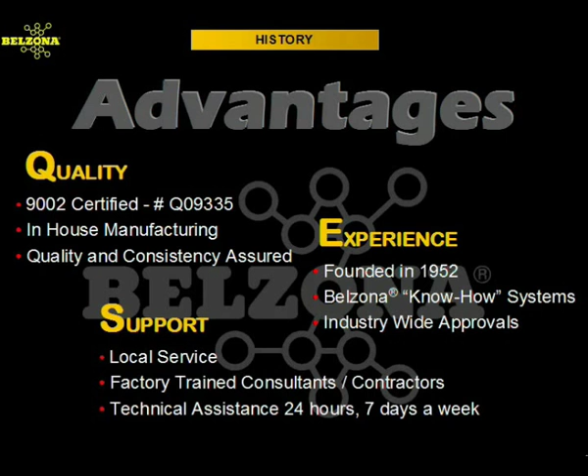Our position in the market as the leader in polymeric solutions has gained us worldwide recognition from prestigious companies, where they specify Belzona procedures and products for the repair and maintenance of their equipment. Belzona can be found all over the world with local representation in over 100 countries. Factory-trained consultants and contractors are ready to help you with your maintenance problems 24 hours a day, 7 days a week.

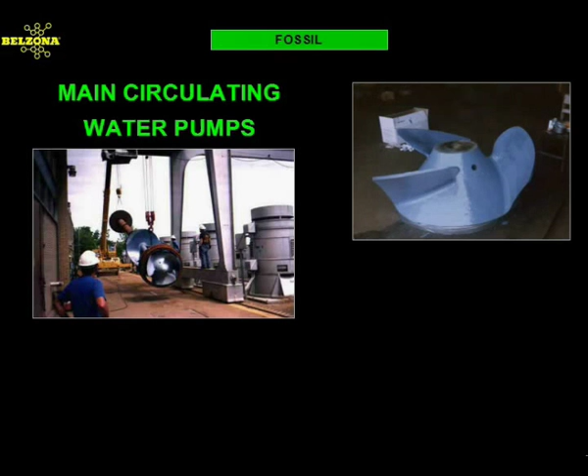Main cooling water pumps are the heart of any power plant. These pumps, because of their size and nature of operation, are costly to maintain and run. Belzona has developed special materials that will protect your investment: specialty rebuilding compounds to rebuild damaged areas without the risk of heat stresses normally associated with conventional welding techniques, and specialty coatings that will reduce the damage caused by erosion corrosion while increasing the efficiency of the pumps, as shown in the following graphs.

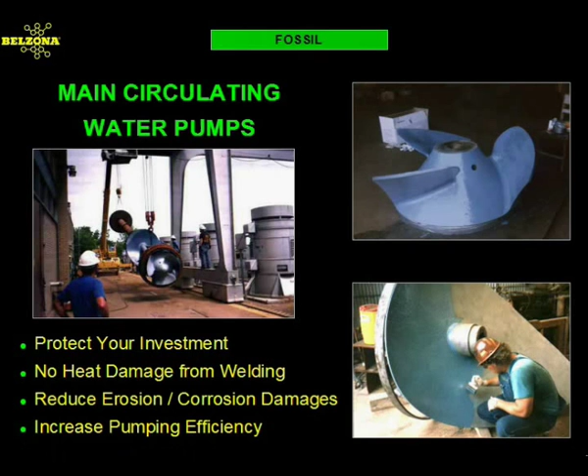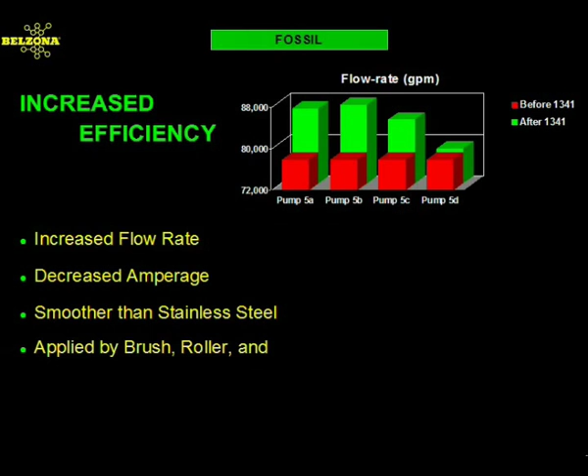Independent testing done by a northeastern power utility on 4 main circulating water pumps demonstrated both an increase in flow rate as well as a decrease in current consumption. This was all possible due to the properties of the Belzona coating, which can obtain a surface finish smoother than that of polished stainless steel, even when applied by brush or roller.

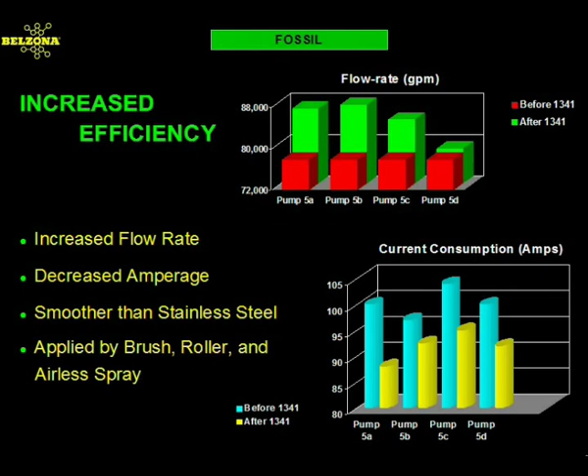In other words, by adopting the right Belzona solution for the maintenance and repair of your pumps, you can save money, not only by prolonging the life of the equipment, but also by reducing its operating costs. Overall, the tested pumps saved this utility over $90,000 per year in operating costs, with a return on investment of only 3 months.

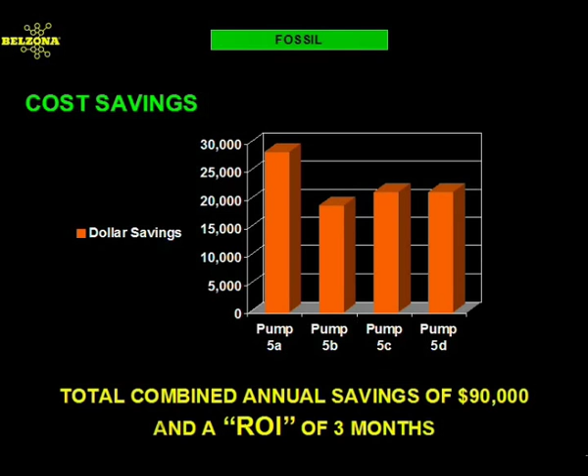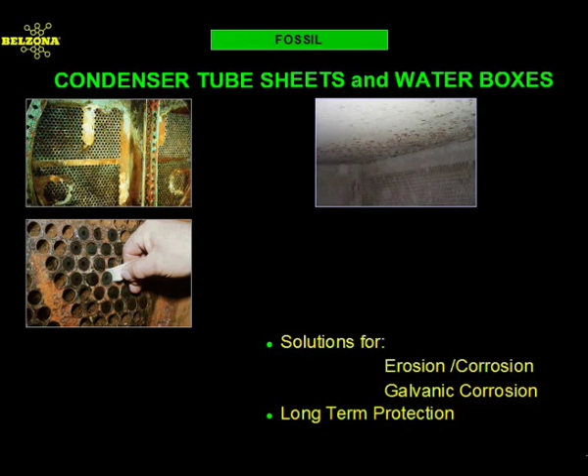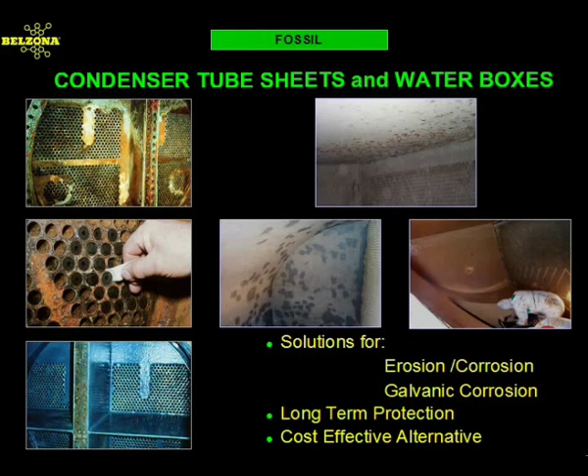Condensers are another type of equipment that can be costly to maintain and repair due to their critical nature. Most of the problems associated with condensers and water boxes can be traced to a combination of erosion corrosion and galvanic corrosion. Belzona has confronted the situation by developing solutions that address the cause of the problem by utilizing materials that excel when exposed to the chemicals and wet environment of this equipment. Belzona solutions are permanent solutions specifically developed to extend the life of your equipment and lower your maintenance costs.

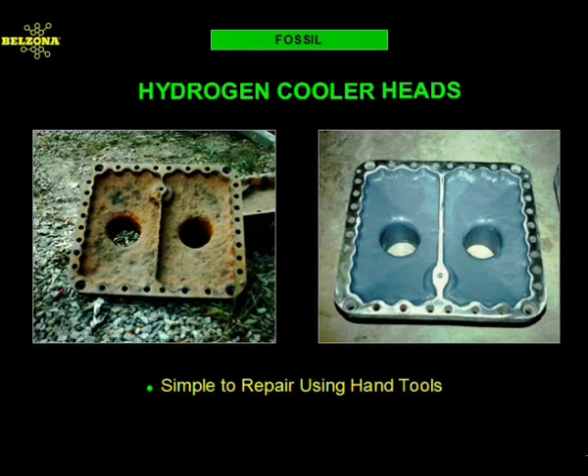This hydrogen cooler head exhibited the typical problems associated with erosion corrosion. The wear and pitting rendered it useless, but with Belzona, this equipment can be reclaimed and put back in service with the use of simple hand tools. The Belzona solution, in many cases, is better than the conventional component replacement. Once a damaged component is fixed with Belzona, it will no longer suffer from the relentless attack of erosion corrosion.

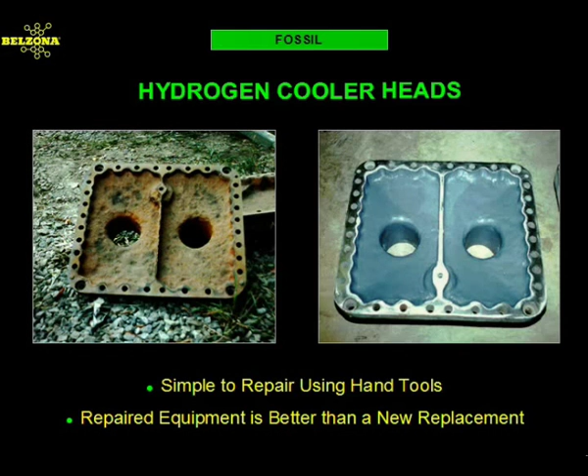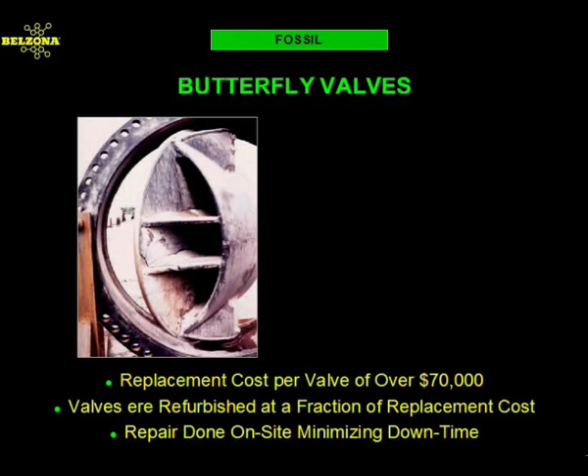This 72-inch Pratt valve in an Indonesian power plant suffered from microbiologically induced corrosion. This condition led to the delamination of the existing rubber liner and the subsequent damage of the valve. With replacement costs over $70,000, the utility was looking for a more economical solution. Belzona stepped in and provided a complete repair package that saved the utility thousands of dollars from replacement costs, as well as downtime losses due to delivery delays.

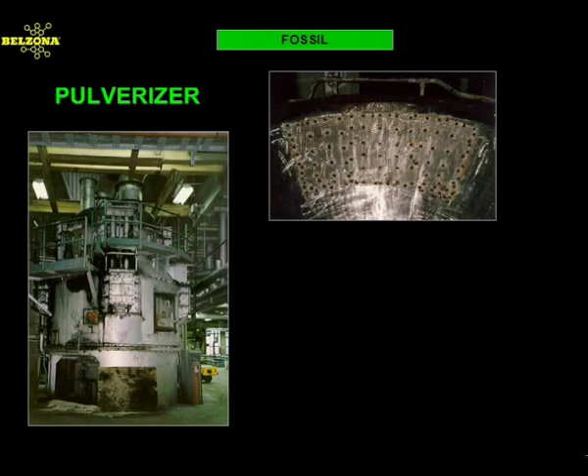This pulverizer classifier cone in a Canadian power plant had to be stick welded on a yearly basis at a very high cost. When approached about this problem, the Belzona consultant recommended a Belzona wear-resistant compound that performed as good as the welding and at a fraction of the cost.

Because of the user-friendly characteristics of the Belzona products, no specialized labor was required, thus reducing the cost of the application. Whether in the field or your repair shops, Belzona will train your application personnel at no cost to you.

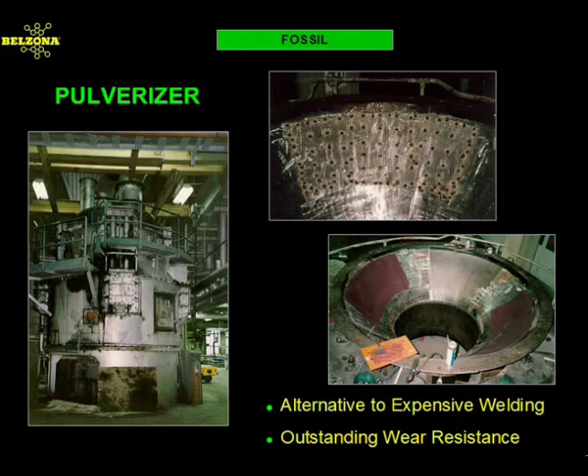Coal fuel pipes are a constant source of maintenance. Due to the erosive nature of the coal, these pipes wear and hole through in a matter of months. This problem is further aggravated by the expense of replacement and losses due to downtime. The Belzona solution offered to this customer addressed both issues by reducing the repair cost and by minimizing the downtime associated with this problem. The Belzona consultant recommended our wear-resistant compound capable of withstanding the punishment delivered by the coal.

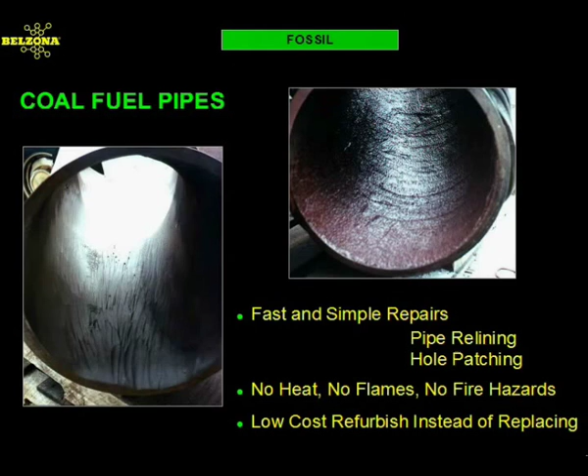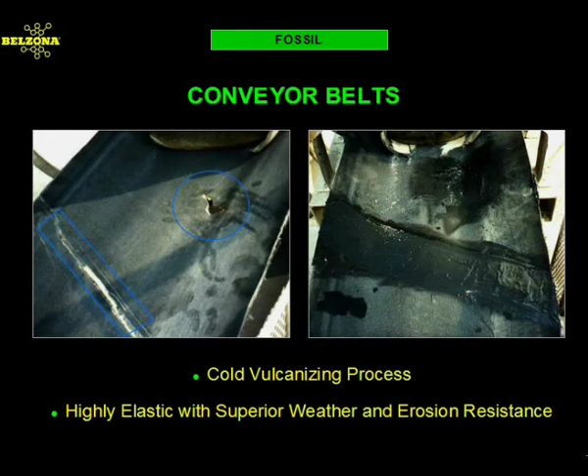Conveyor belts are another source of critical problems. The main problem is not the cost of the repair, but the difficulties associated with conventional hot vulcanizing processes. Belzona can offer you repair solutions with elastomeric products that will cure at ambient temperatures without the need of expensive and cumbersome vulcanizing equipment. These elastomers are specifically designed to resist the abuse of coal transportation. The physical and mechanical characteristics of the Belzona elastomers place them well above that of natural rubbers, thus offering greater weathering and abrasion resistance.

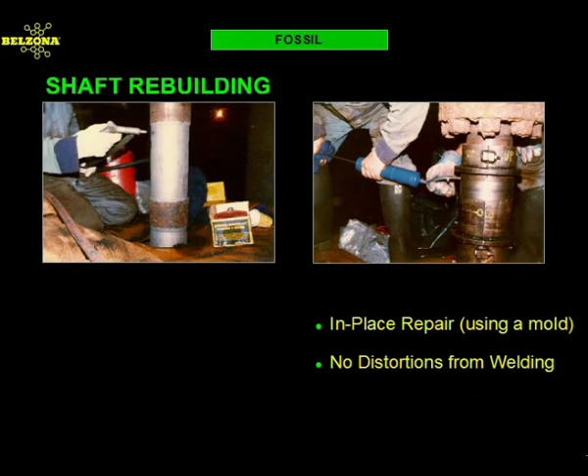Many of the repairs encountered by Belzona consultants are on equipment in confined spaces, where the cost of disassembling is more than the cost of the component itself. In this and similar cases, Belzona has developed special application techniques that will allow the repair to be done in place and with minimal disassembly. Our molding techniques are proven solutions that have saved millions of dollars to the power industry.

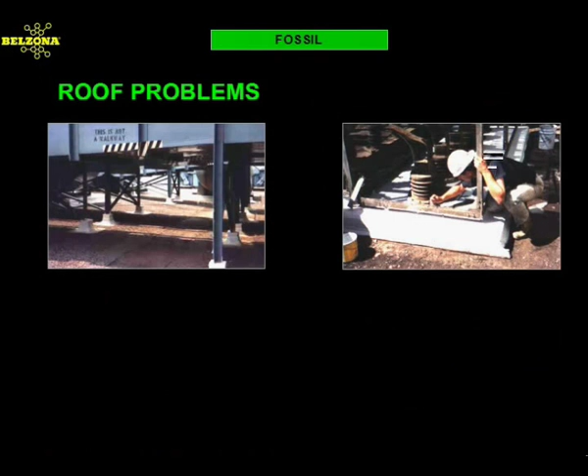Contraction expansion, thermal cycling, UV light, and acid rain are just a few of the factors that contribute to a roof failure. Belzona has developed high-performance membranes and sealants that will solve your problems once and for all. These products have been specifically designed to withstand the rigors of a roof system. Belzona roofing solutions include products that can be applied under wet conditions, including underwater curing for those circumstances requiring emergency repairs.

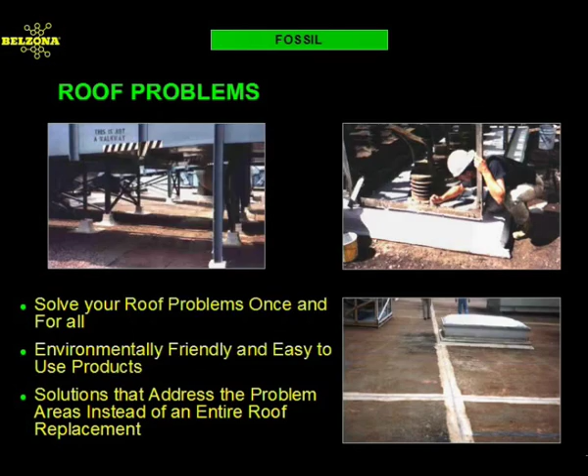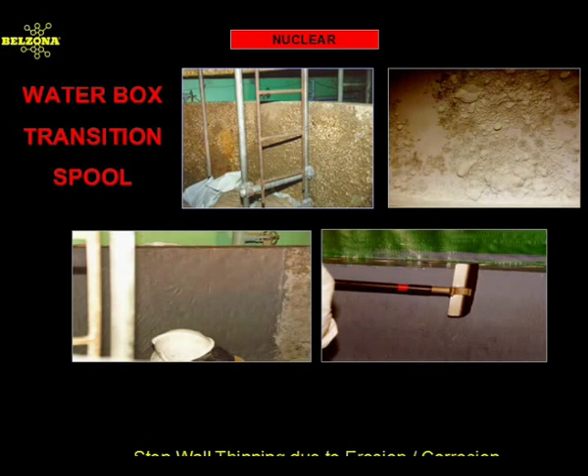The water boxes in this nuclear power plant in California were severely pitted after just a few years of operation. If ignored, this pitting could lead to a catastrophic failure, and replacement expenses could scale up into the millions of dollars. Because main condenser water boxes are critical components, this utility needed a solution that would eliminate the risk of plugging the tube sheet.

The recommendation from the Belzona consultant included a paste-grade material to fill the pitting and a protective coating to prevent further erosion-corrosion from the seawater used as a coolant for the condenser. The Belzona products used in this application contained no VOCs, thus allowing the material to be applied without the need of cumbersome and costly air filtering equipment.

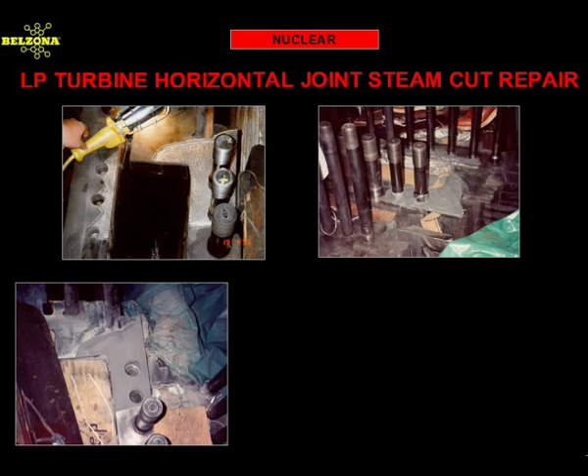This leading U.S. steam turbine manufacturer uses Belzona as the only compound for the repair of steam cuts in the flange area of an LP turbine. The conventional repair included the use of welding and costly in-place machining. The Belzona solution utilizes simple hand tools and molding techniques to do the same job at a much lower cost and without the need to machine.

This nuclear power plant in California has been doing this repair since 1990 with excellent results. Savings related to this repair run into the thousands of dollars compared to less than $500 per repair using Belzona.

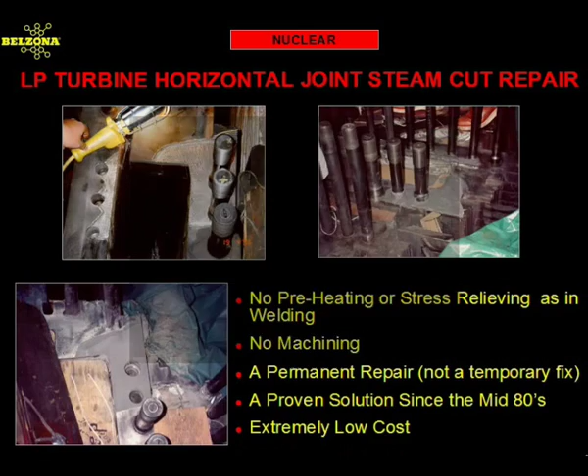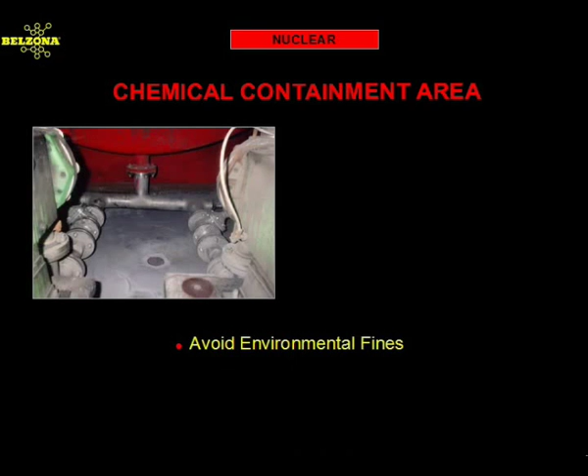Due to environmental regulations, chemical containment areas are fast becoming another source of problems for maintenance personnel. The problem is that concrete by itself is not capable of resisting chemical attack from the strong acids and bases used for water treatment. This power plant in the Northeast was being fined thousands of dollars by the EPA for inadequate containment. Previous attempts to solve the problem did not last, and the problem resurfaced again.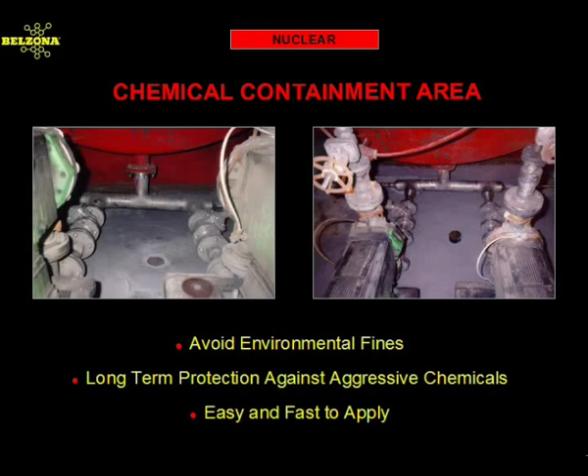Faced with this challenge, the Belzona consultant recommended our chemical-resistant coating to solve the problem. This coating can resist prolonged immersion in very high concentrations of both acids and bases, which makes it the ideal candidate to solve the problem. Just as containment areas suffer from chemical attack, pumps handling these chemicals also face the same problem.

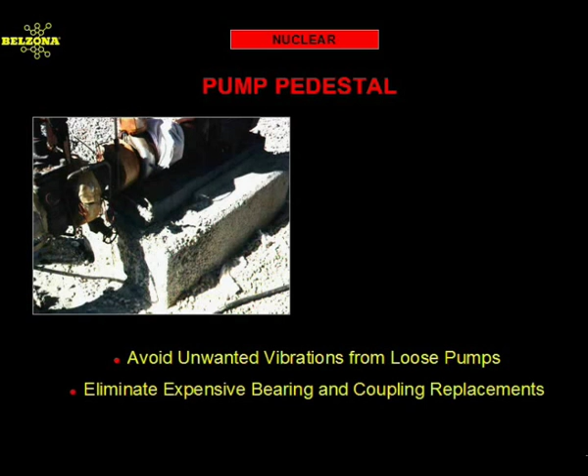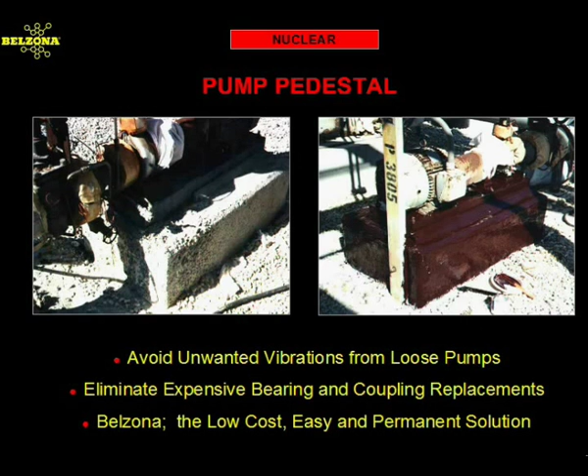The deterioration of a pump pedestal can be extremely expensive, and a loose pump can vibrate and cause the premature failure of bearings and drive mechanisms. The permanent solution for this problem is to rebuild and protect the pedestal with Belzona's chemically resistant products. By using Belzona for this repair, this power plant saved money in the long run by not having to constantly rebuild the pedestal.

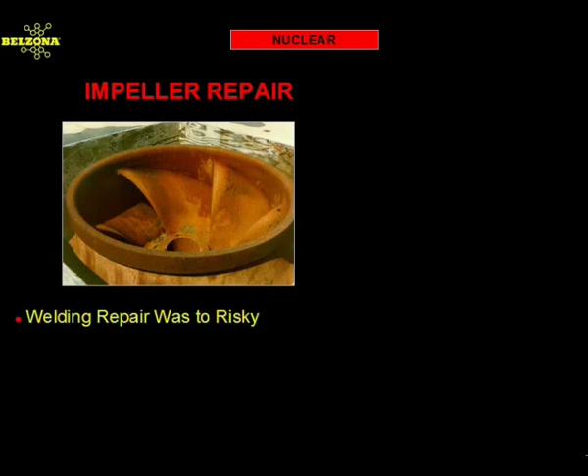This main circulating water pump impeller at a Canadian nuclear power plant was ready to be sold as scrap metal. Because of its cast iron construction, the engineers did not want to use conventional welding techniques and risk structural damage from the heat generated by welding. Instead, Belzona was chosen not just because of its physical and mechanical properties, but because of its proven track record among nuclear power utilities around the world.

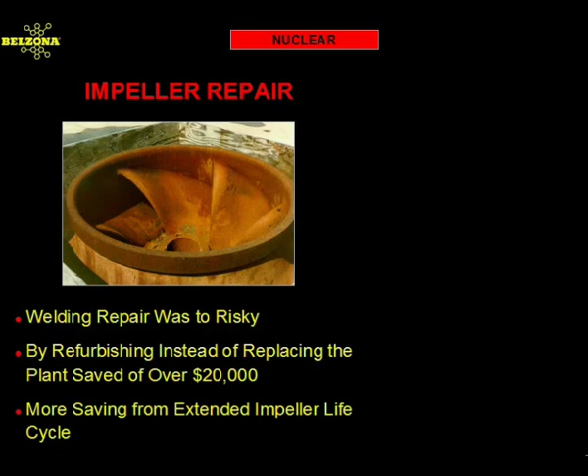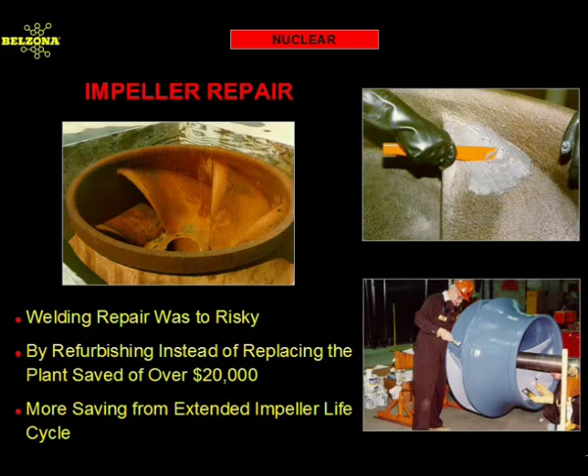This nuclear power plant initially saved over $20,000 by using Belzona rather than buying a replacement impeller. But the savings didn't stop there. This plant will continue to save money as the repaired impeller will require less maintenance while exceeding its original life cycle. The repair of cooling tower basins is another high-cost repair faced by many power plants.

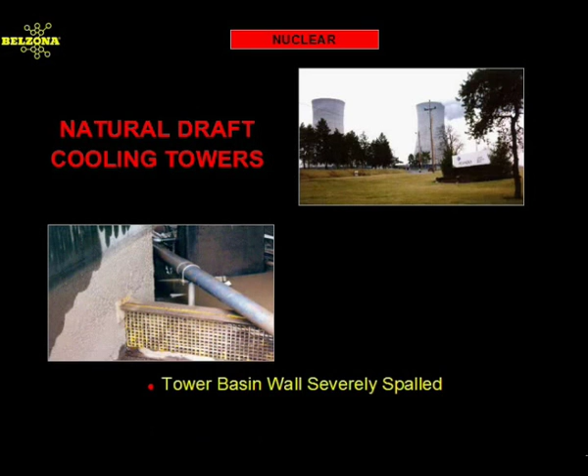This cooling tower in a northeast nuclear power plant experienced excessive pitting of the concrete basin due to exposure to 98% sulfuric acid. All previous efforts to solve this problem failed until Belzona was called to solve the problem. Working in conjunction with the cooling tower builder, Belzona provided a long-term solution at a fraction of the cost compared to the expenses accrued for past failed repairs.

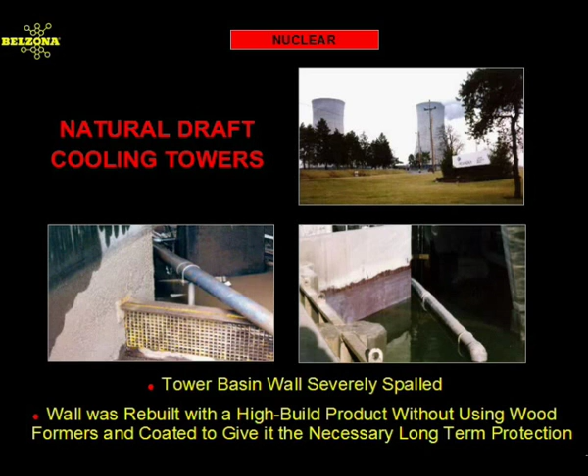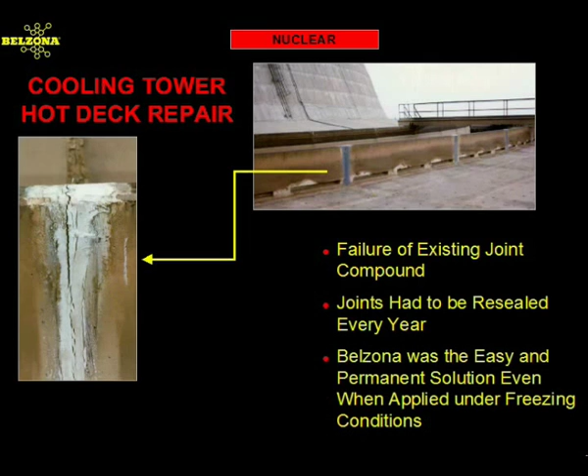The expansion joint in the hot deck of the same cooling tower was another problem that had to be fixed every year. The problem was the freezing and thawing caused by seasonal changes and the inability of conventional materials to remain flexible, causing them to fail in a short time. The utility carried out these repairs every year for 5 years until Belzona solved the problem permanently.

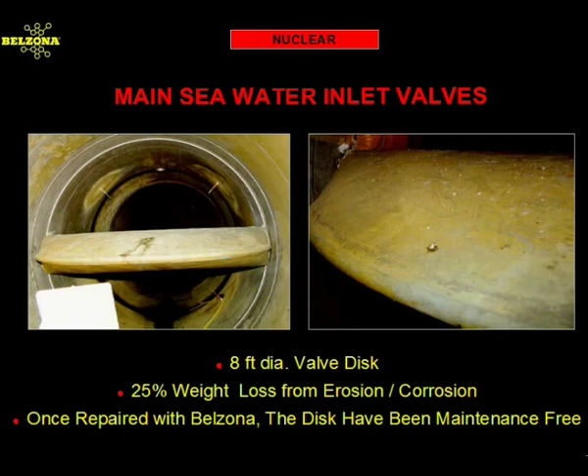This main seawater inlet valve at a nuclear power plant in California experienced severe loss of weight due to excessive corrosion of the valve. Water flow over the valve is in excess of 400,000 GPM. Welding repairs only lasted 18 months at a cost of over $92,000 for all 4 valves. The recommended Belzona product was applied in 1989. Since then, the valves have not required any further repairs or maintenance.

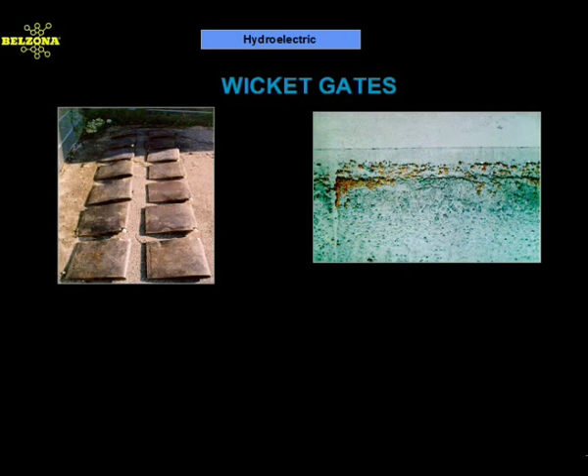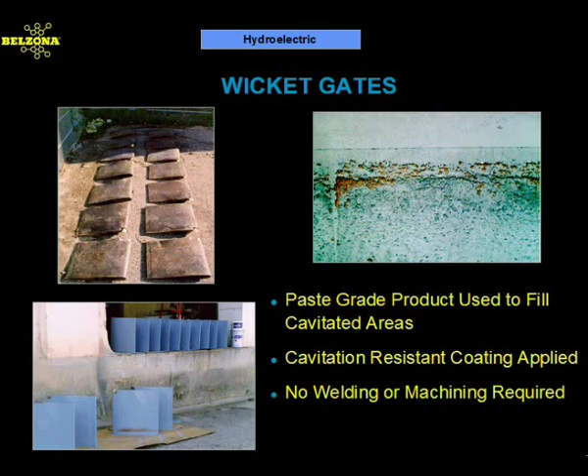These wicket gates at a hydroelectric plant in Puerto Rico started to show light cavitation damage only after a year of operation. Rather than risking the integrity of the gate by spot welding, plant personnel decided to use a better solution. The repair consisted of filling the cavitation damage with a rebuilding grade compound and coating the gate with a Belzona cavitation resistant coating. Although cavitation is a very damaging phenomenon, Belzona has developed materials that will resist light to mild cavitation with good success.

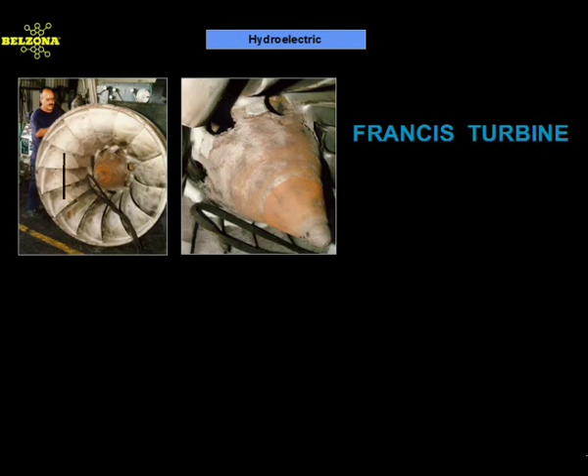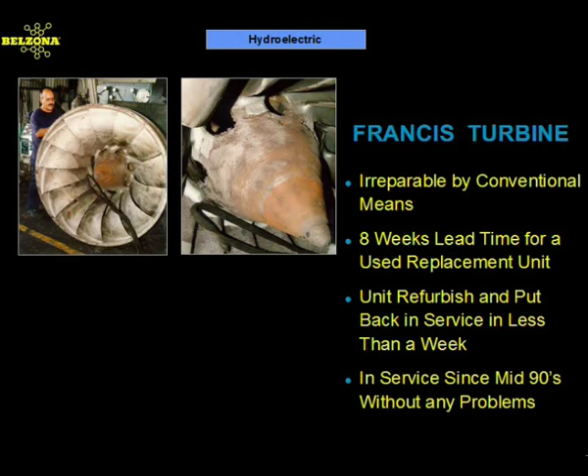This Francis runner at another hydroelectric plant in Puerto Rico shows severe signs of erosion corrosion. Damages to the area adjacent to the cone were massive, rendering the turbine unrepairable by conventional means. Replacement cost and a delivery time of 6 to 8 weeks would have cost the utility thousands of dollars in downtime. Belzona was applied to rebuild the eroded area and a protective coat applied to the turbine to further protect it from the effects of corrosion.

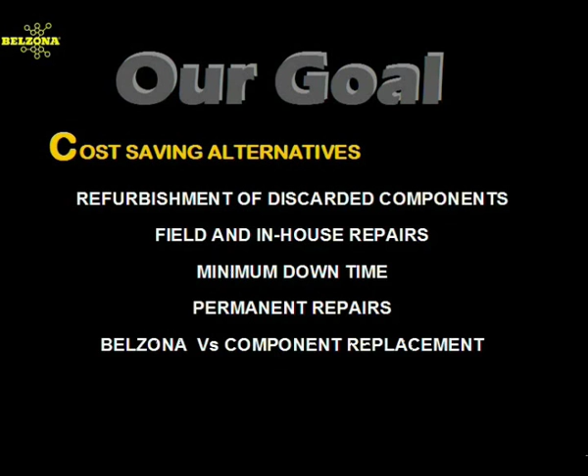Our goal is to provide you, our customers, cost-effective solutions. We accomplish this by developing solutions that allow you to reclaim discarded equipment, with safe and easy products that allow many applications to be carried out in the field, minimizing costly downtime. By focusing our solutions on addressing the cause of the problem, we can offer for the most part permanent solutions that in many cases perform better than new replacement components. It is this philosophy that has made us industry leaders and will provide you with significant savings in the maintenance and operation of your equipment.